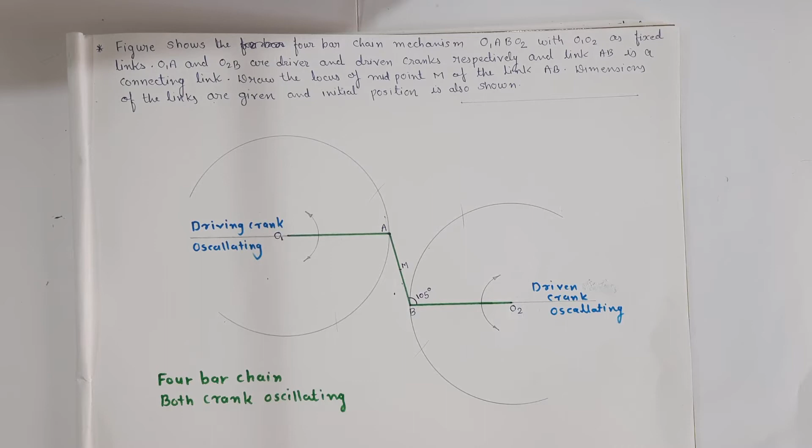Hello everyone. Today we will draw a locus of a point for given constraints in a 4-bar chain mechanism.

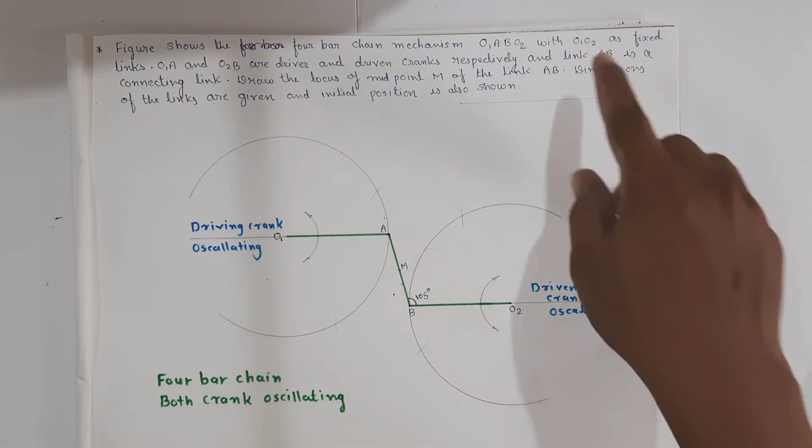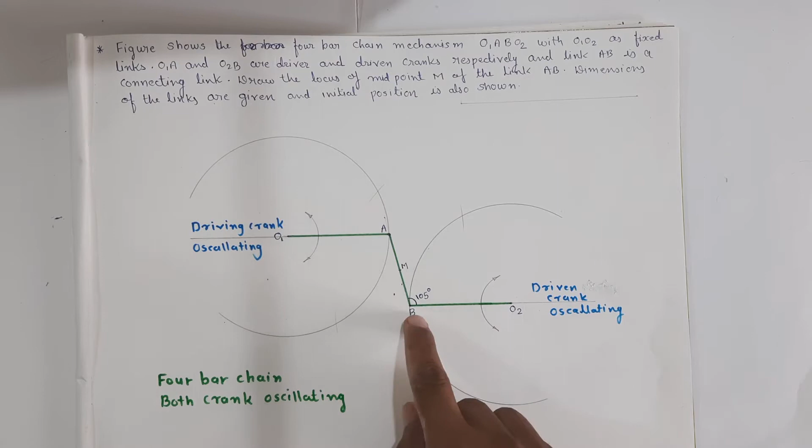So here is the given question. The figure shows the 4-bar chain mechanism O1ABO2 with O1O2 as fixed links. O1A and O2B are the driving and driven cranks respectively, and link AB is the connecting link.

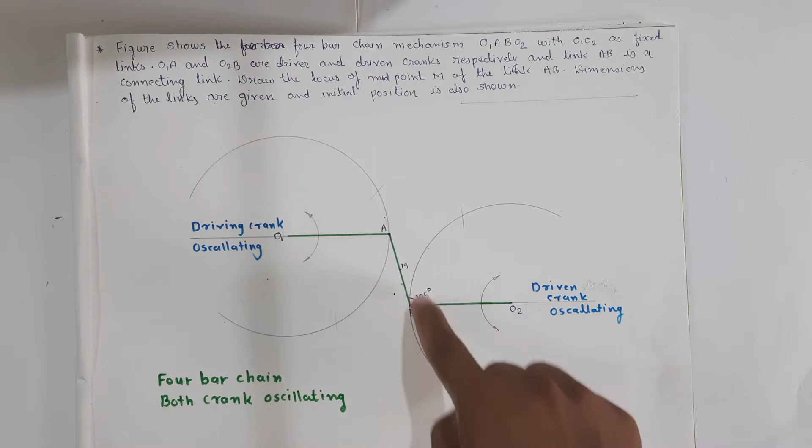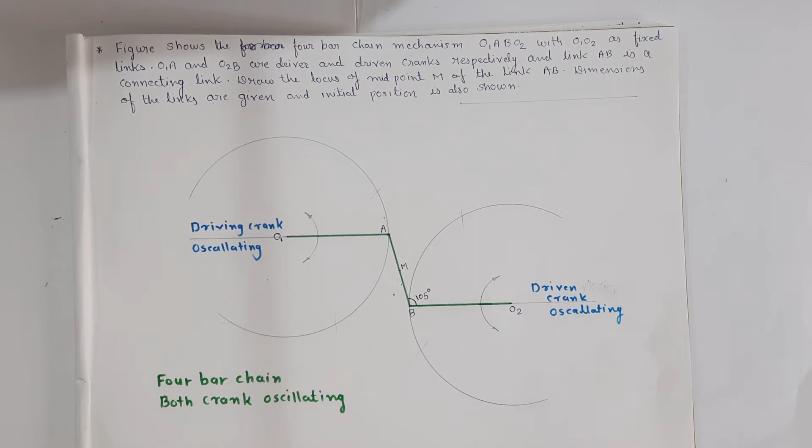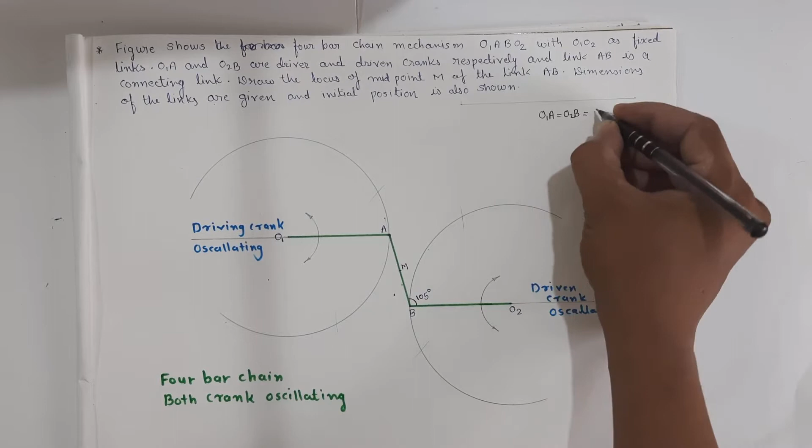Draw the locus of midpoint M of link AB. Dimensions of the link are given and the initial position is shown in the figure: O1A is equal to O2B, equal to 60 mm, and AB is equal to 45 mm.

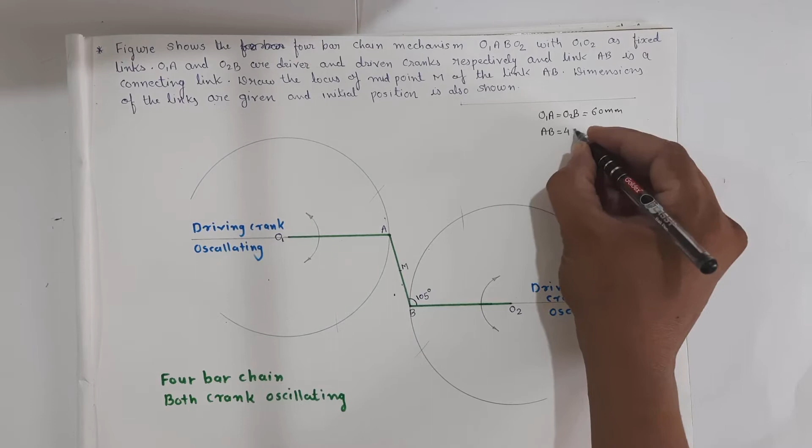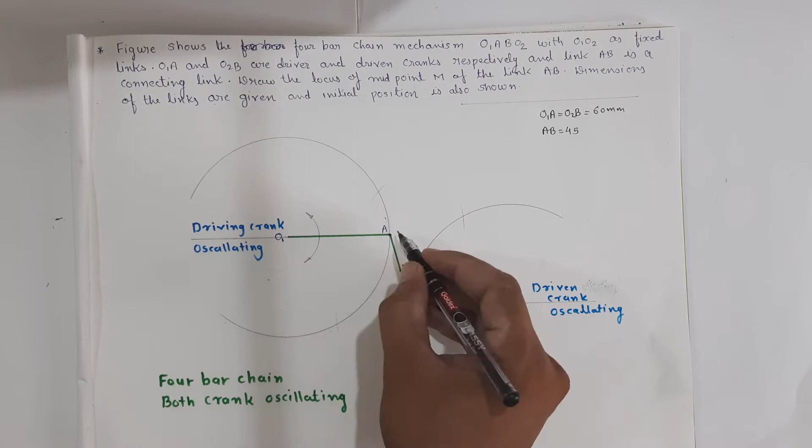First we have to mark O2, then measure 60 mm to mark B. Then measure a 105 degree angle and draw BA, equal to 45 mm. Now draw a line parallel to O2B from A and mark O1 at a distance of 60 mm from A. So draw this link.

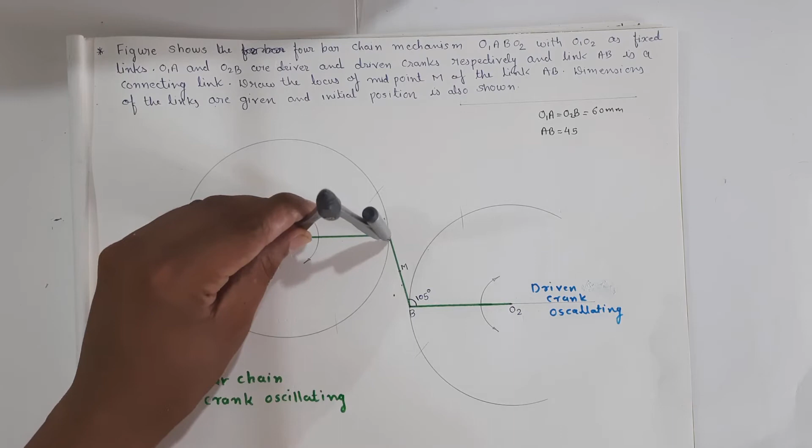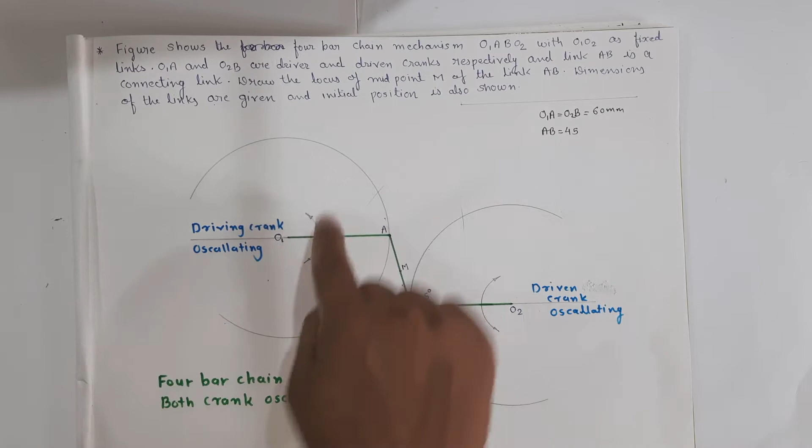After drawing that link, we have to draw the locus of A and locus of B. These links O1A and O2B are oscillating links, so they will oscillate in clockwise and anti-clockwise directions like this. Measure O1 to A and draw the arc - this will be the locus of A, and this will be the locus of B.

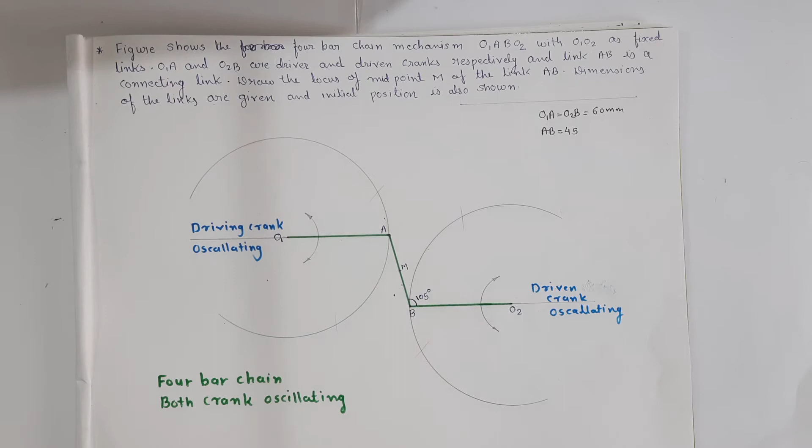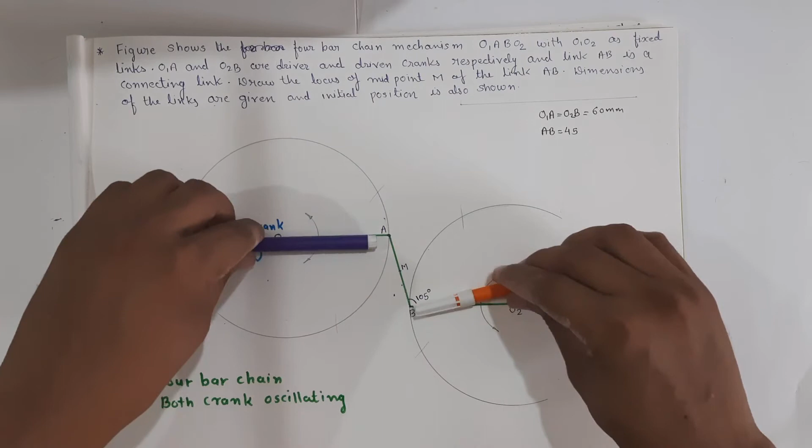After drawing the locus of A and locus of B, we have to find the maximum extension of the links, as we can see these links are oscillating like this. Both links oscillate like this. Now we have to find the maximum extension, that is the maximum extension of O2BA and the maximum extension of O1AB.

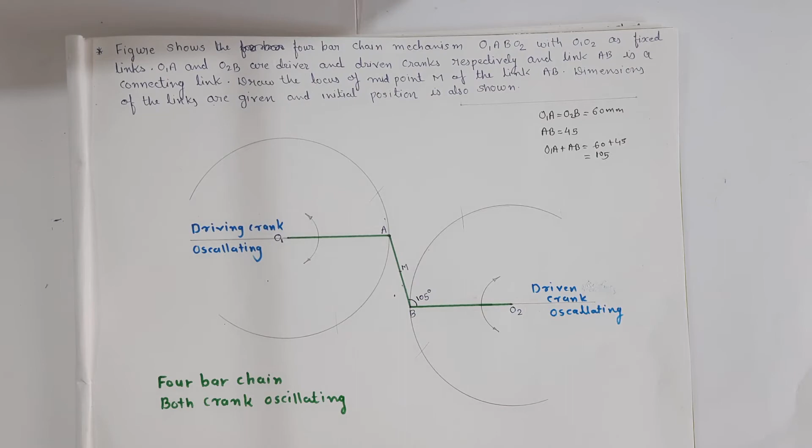For that we have to find the data, that is O1A plus AB, which is equal to 60 plus 45. So the maximum extension of the link will be equal to 105 mm. Measure 105 mm - here I have drawn the line of 105 mm - and find the maximum extension of the link.

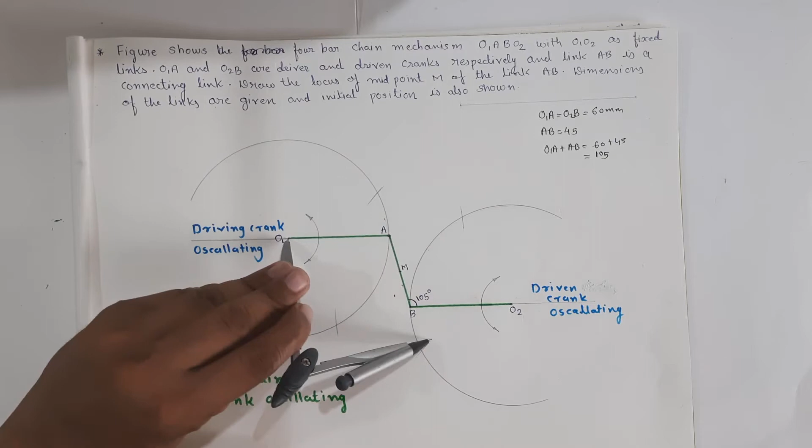Maximum extension of O2BA will be over here and over here. Maximum extension of O1AB will be over here and over here. So these are the maximum extensions of the links.

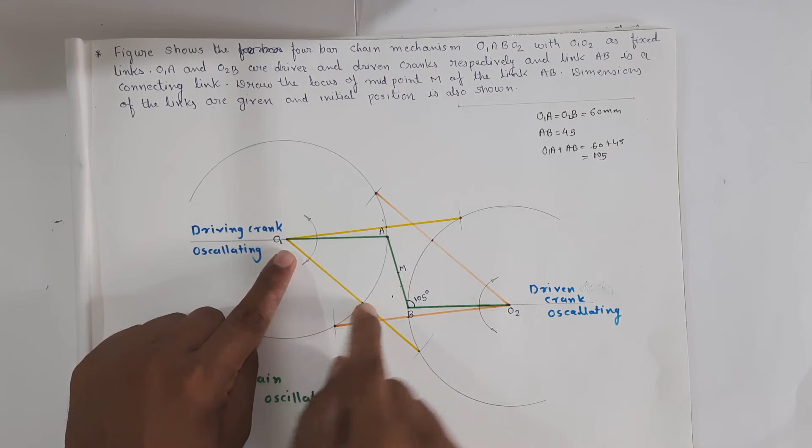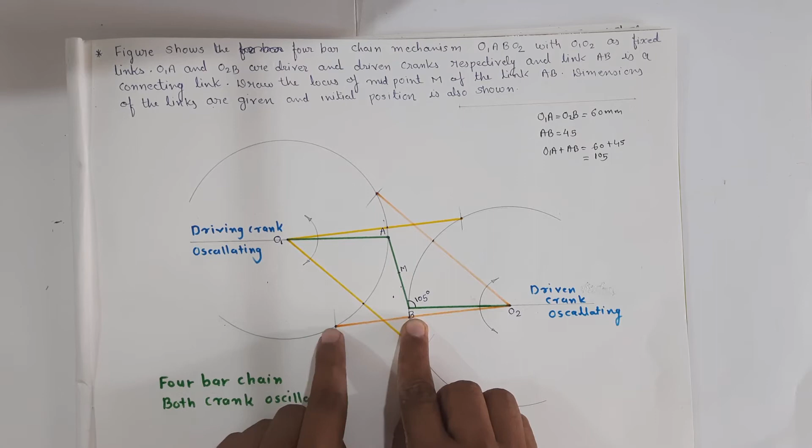That means when the O1A link reaches this point, B will reach here - this is the maximum extension of link O1AB. Similarly, whenever O2B reaches this point, A will reach here, and when the O1A crank reaches here, the link BA will reach here. So these are the maximum extensions of the link.

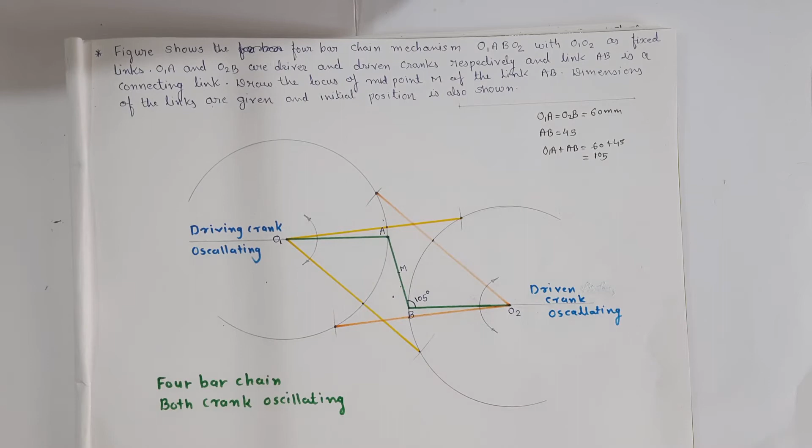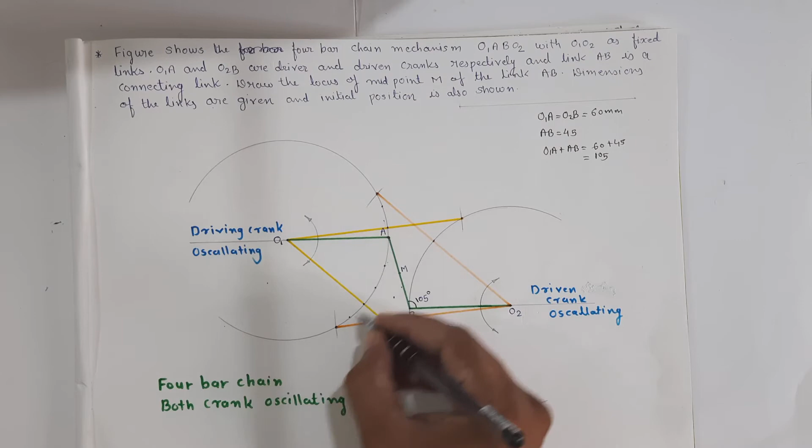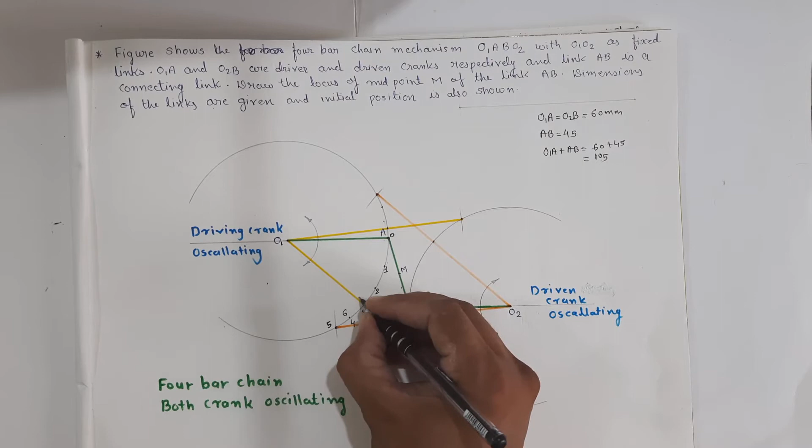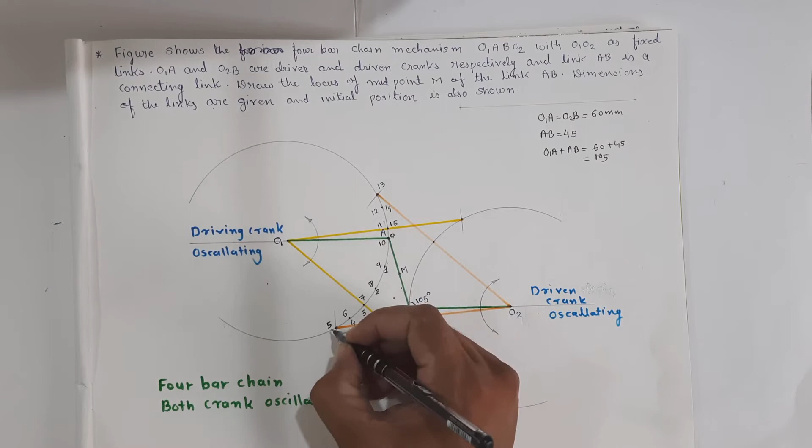After finding the maximum extension of the link, mark points 1 through 15 randomly on the arc of the circle. Let this be the A0 point - 0, A0. This will be 1, this will be A2, this will be A3, A4, 5, then after reversing 6, this will be 7, 8, 9, at 0 it will be 10, then 11, 12, 13, 14, and 15.

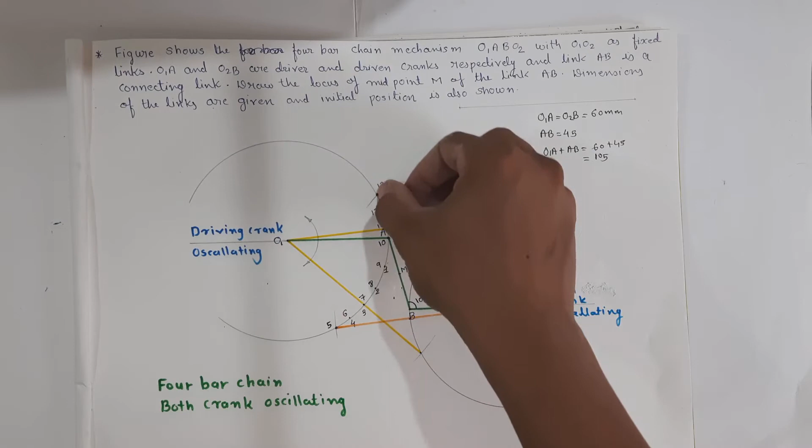Mark the points to show the locus of A. So the locus of A moves between 5 and 13.

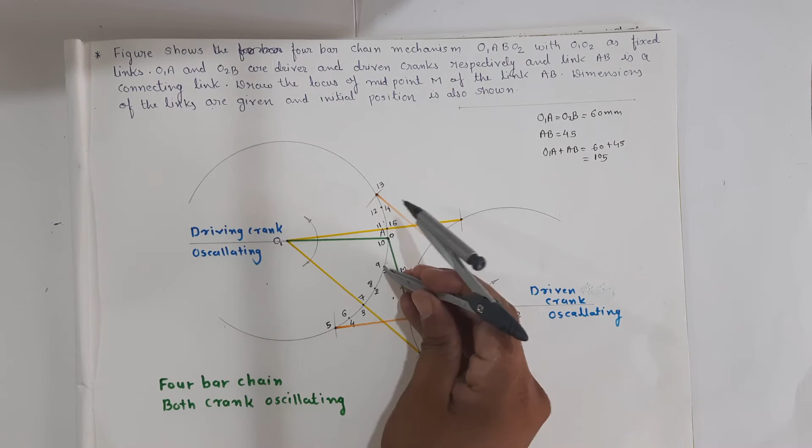Now we have to find the locus of B. For that, measure the length of the A to B link. Put the compass around point 1 - when A moves over here, we get the B1 point here. So join this B1 point.

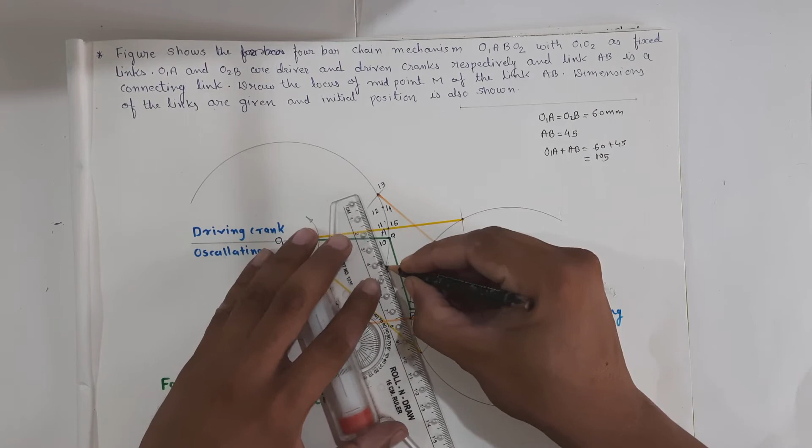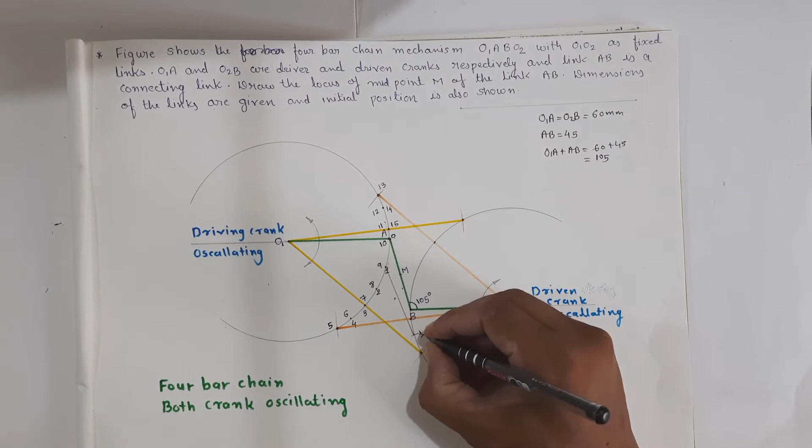So this will be 1, and as we have to find the locus of the midpoint, this will be M0. Then at a distance of 22.5 mm from B and from A, we get the midpoint at 22.5, because the length of link AB is 45 mm.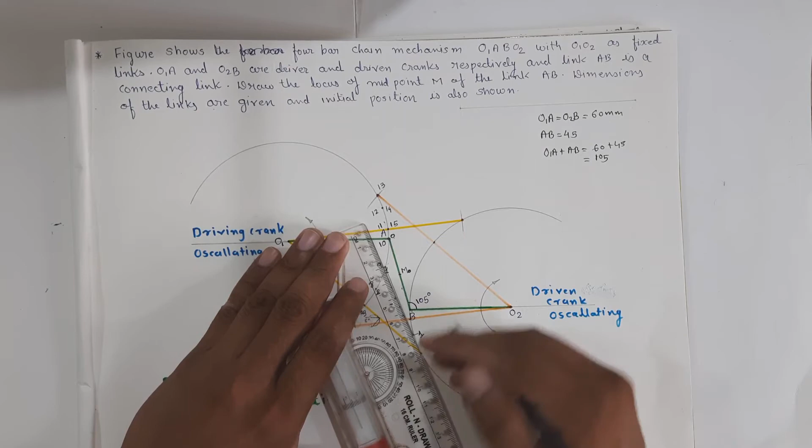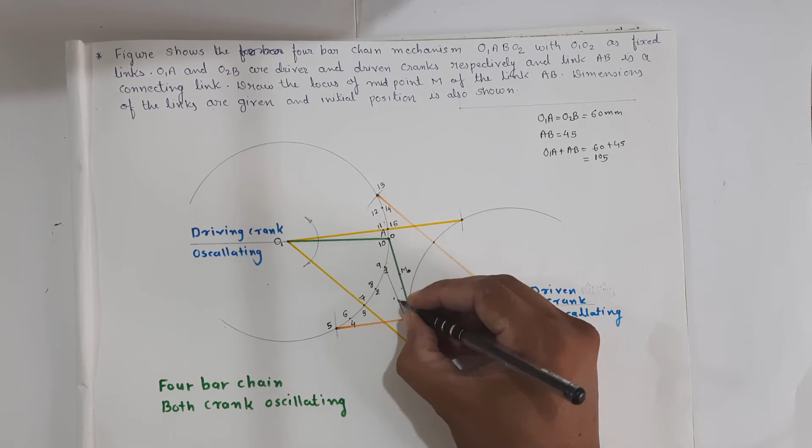So mark a point on this line having length equal to 22.5 mm - so measure 20, 21, 22, and 22.5. This will be M0, and this will be M1 point.

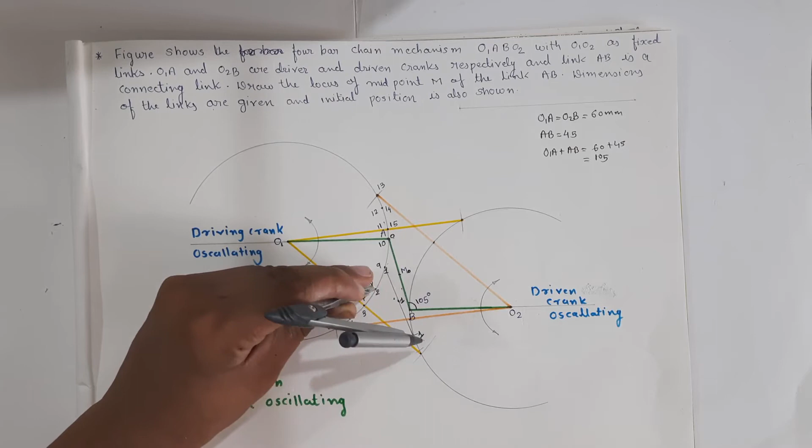Now similarly, put your compass on point 2 and draw an arc - this will be the second point.

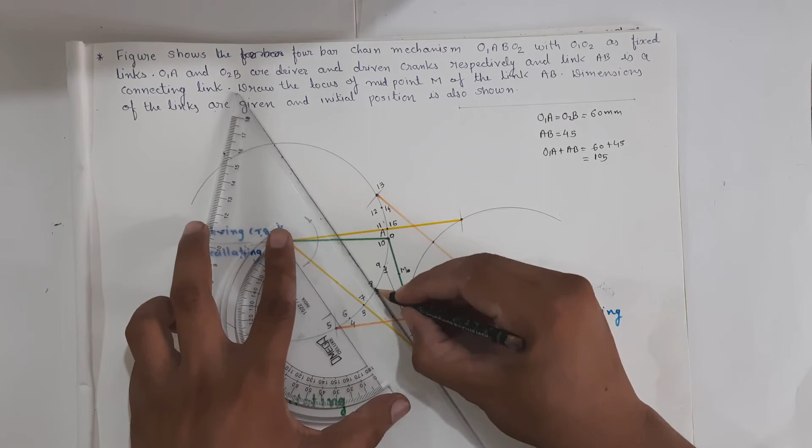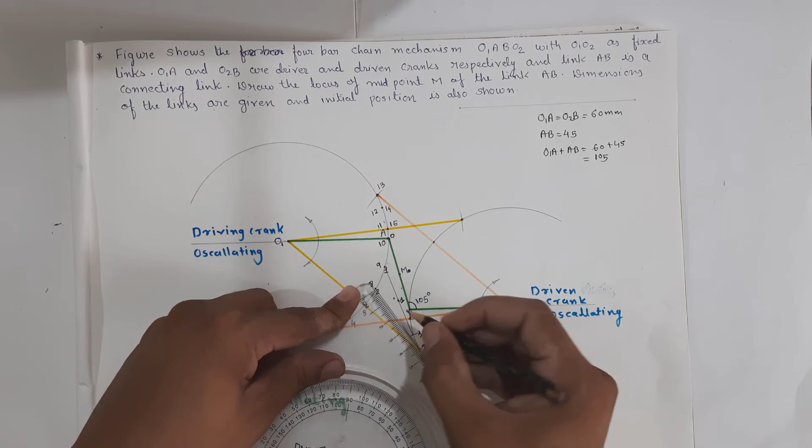Join these points 2 to 2 and mark the midpoint of the link. We will get the locus of M at 22.5 mm. So this will be point 2.

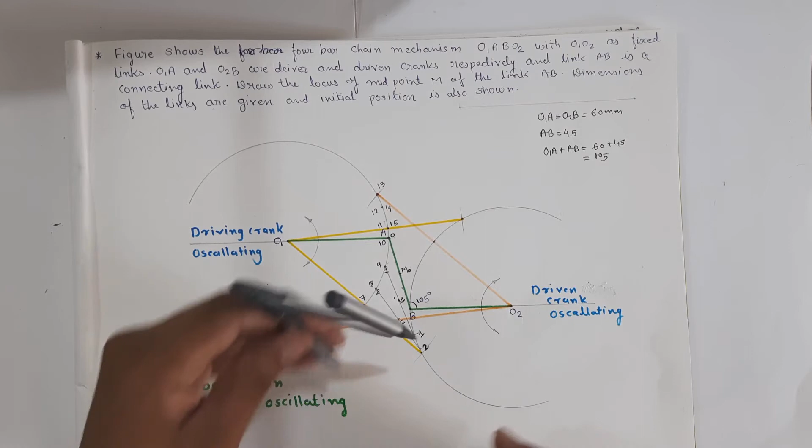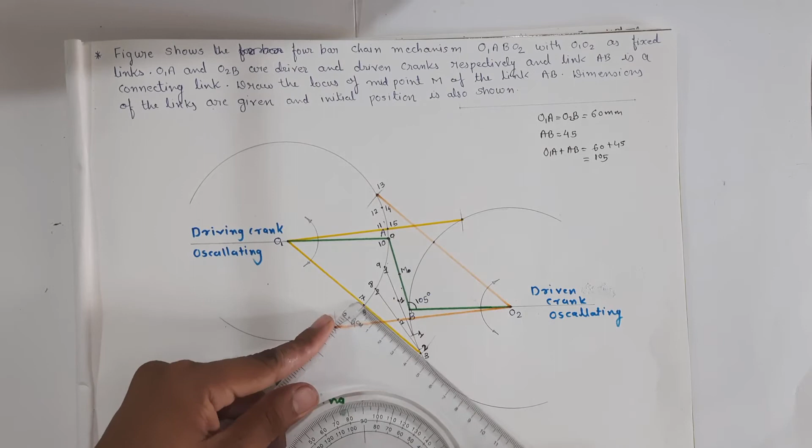Now this will be the third point that we have already marked over here, point 3. Now mark the midpoint of this link. This is the locus of link AB. So this will be the third point. So these are the locus of midpoint M, these are the locus of B, and these are the locus of A. So from locus of A, we have to find out the locus of B.

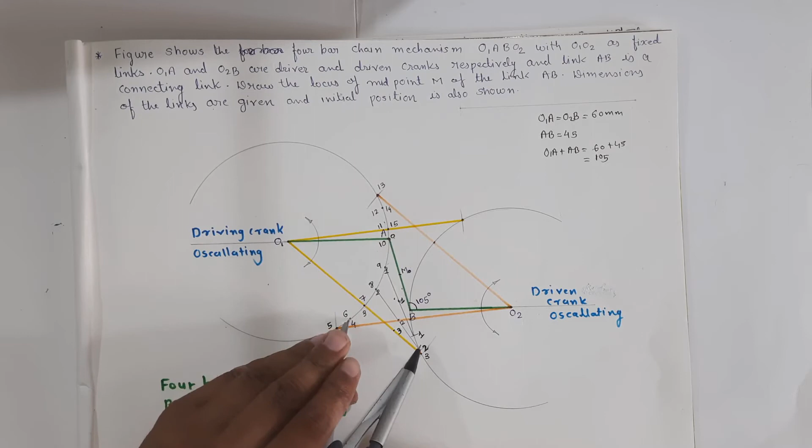Now over here we will get the third point. You have to mark the point accurately, because the distance between the 2 points is too less. So we have to mark the points accurately. So this will be the fourth point.

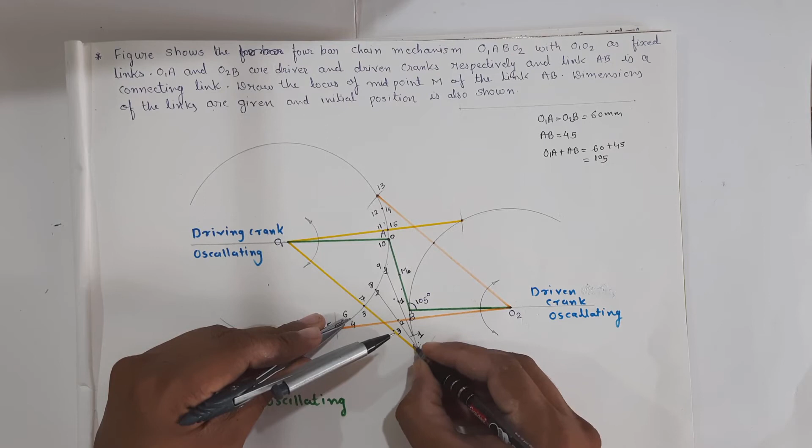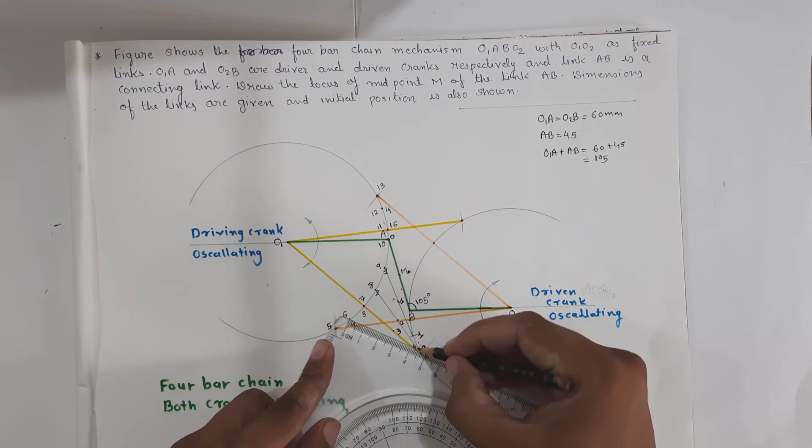Join 4 to 4 and find the midpoint of this link at 22.5. So this will be the fourth point on the link.

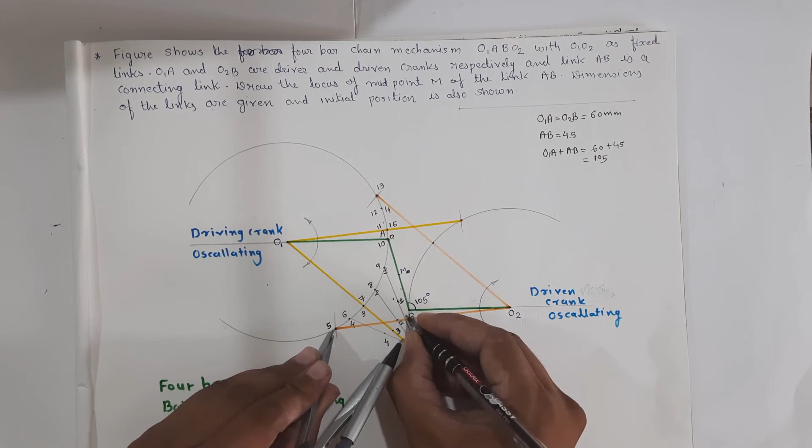Now 5 will be over here, that we have already marked. Over here, mark the point accurately. So this will be the 5th point over here.

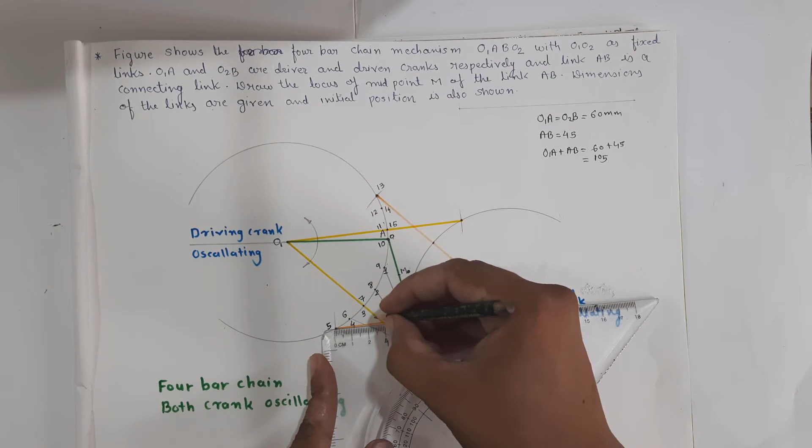Now find the midpoint at 22.5. So this will be the fifth locus of M, midpoint M. You can give the name M0, M1, M2, M3, but here due to less space we have marked only 1, 2, 3, 4. Over here also we can mark A0, A1, A2, but due to less space we have marked 1, 2, 3 only.

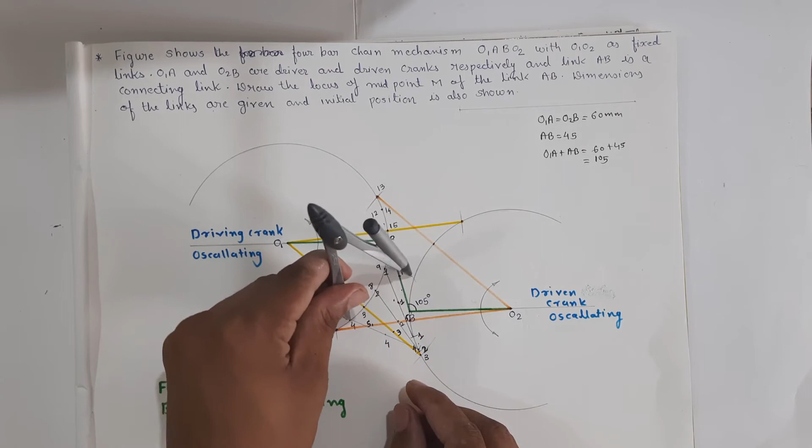Now from 6 we will mark over here. So this will be the 6th locus of B.

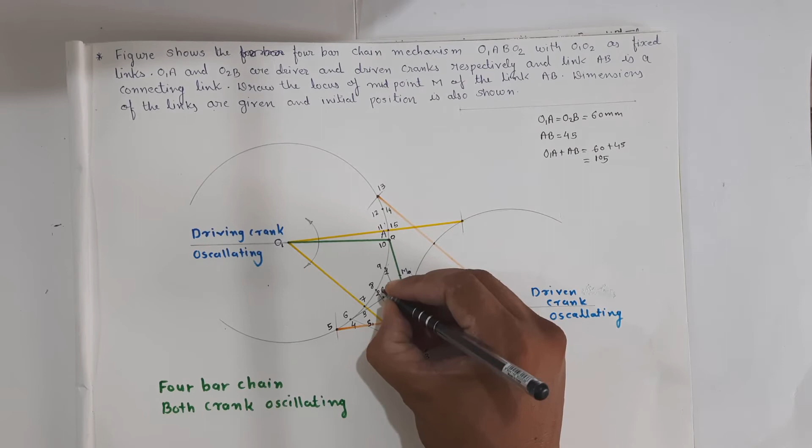Join this line, 6 to 6, and find the midpoint of 6 to 6 to get the 6th locus of the midpoint M at 22.5 mm over here. To mark that point, this will be the 6th locus of midpoint M.

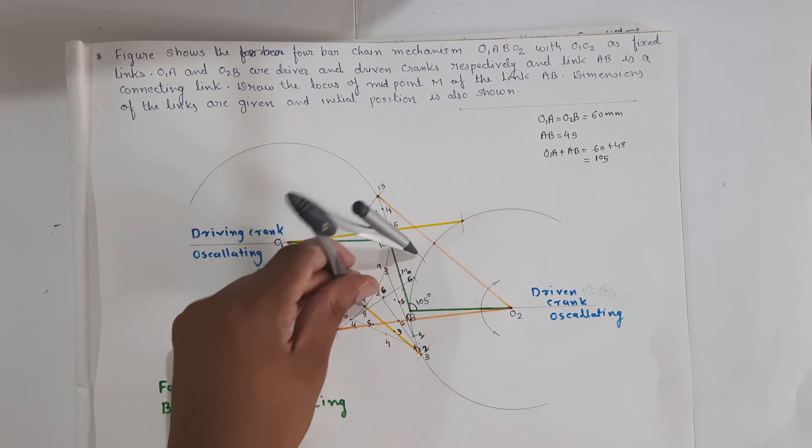Now 7 to 7, give an arc over here. So this will be the 7th locus of point B. Join 7 to 7. You have to do it step by step because you have to be precise. At 22.5, this is the 7th locus over here.

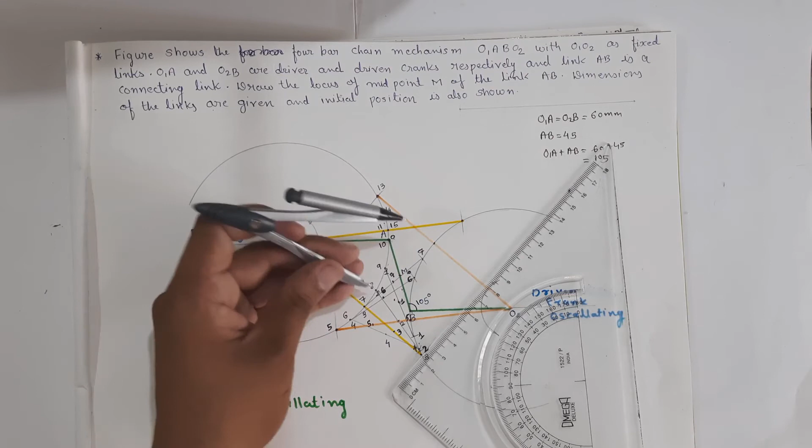Now 8 to 8 over here, give an arc over here. You will get the 8th point over here, near to this point. Join 8 to 8 and find the midpoint at 22.5 mm. We will get the 8th locus of midpoint M.

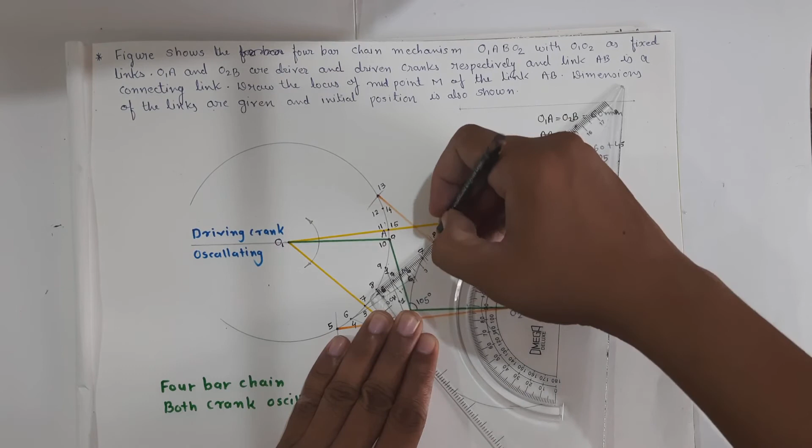This is 22.5 over here. So this will be the 8th point, the 8th locus of M.

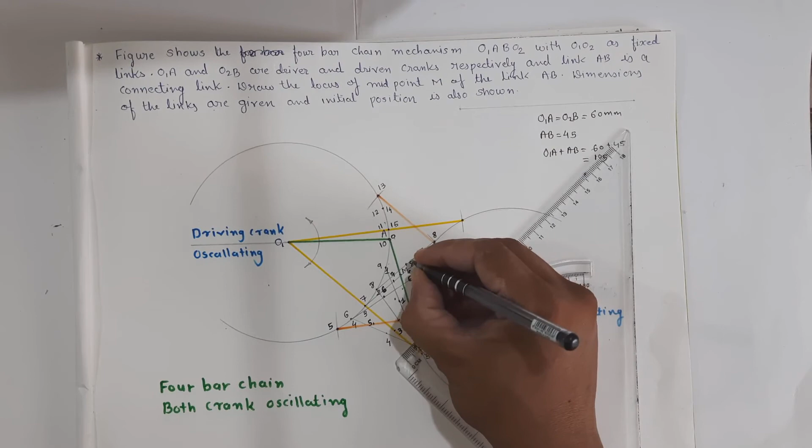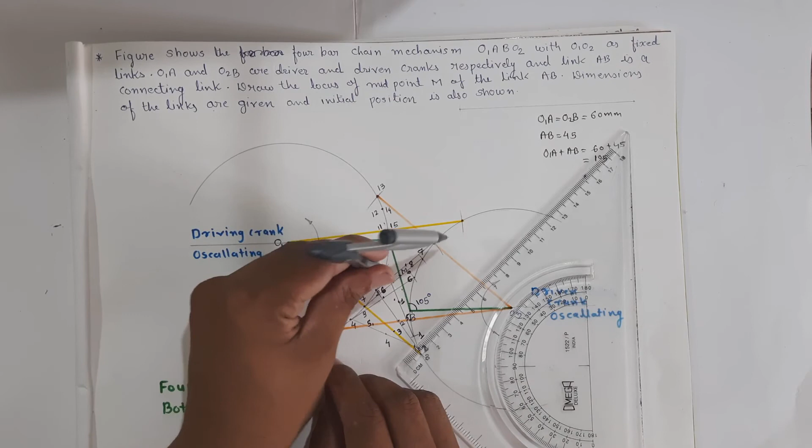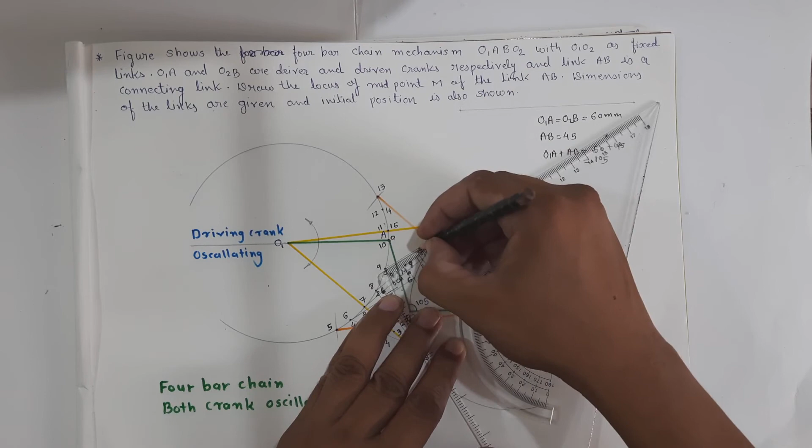Now 9 to 9, the 9th locus of point B. Join 9 to 9 and find the midpoint. To find the locus of point M, find the midpoint at 22.5 mm. So this will be the 9th point here.

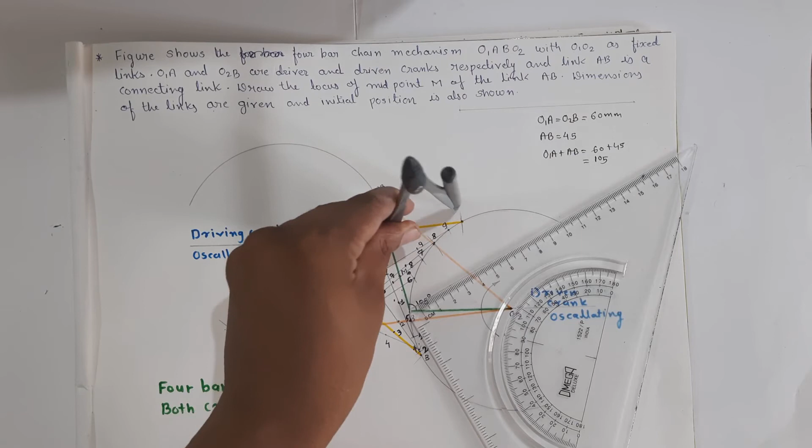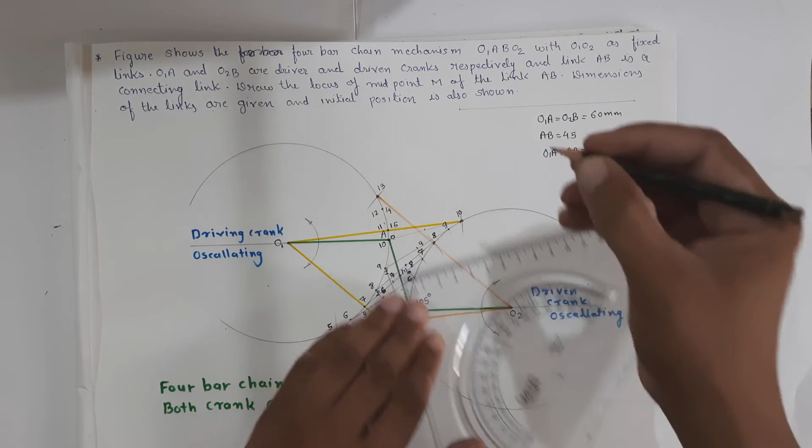Now 10 to 10. It is over here. Join 10 to 10. It is a little nearer to this point. Find the midpoint at 22.5 mm. We will get the 10th locus of midpoint M. Now 11 to 11.

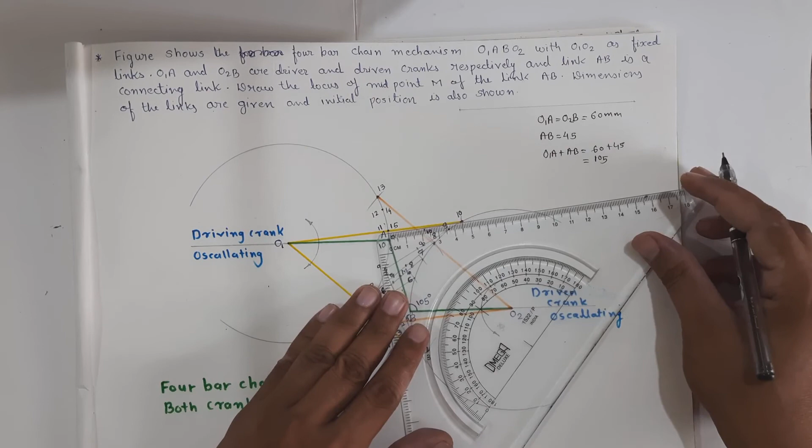Find the midpoint at 22.5 mm. This will be the 11th point of midpoint M.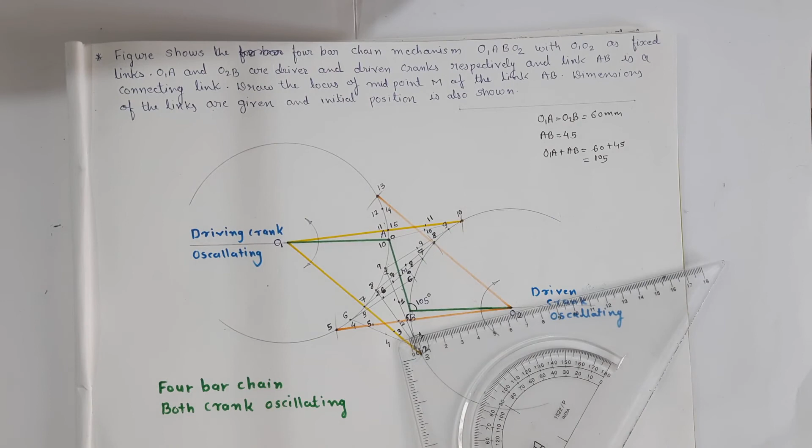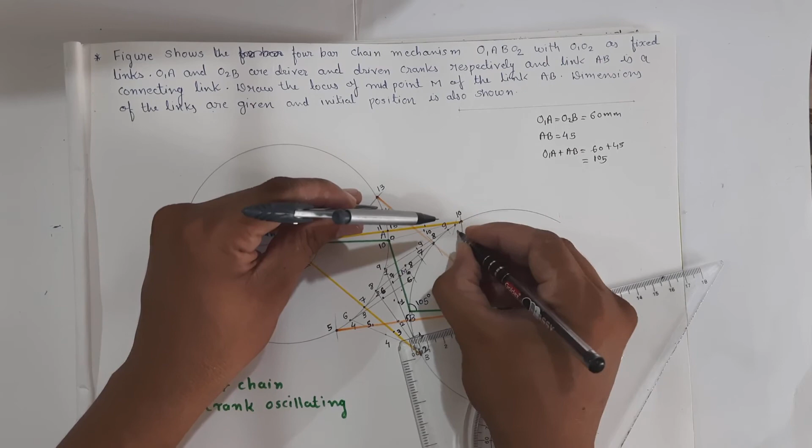12, reverse over here. This is the 12th point. Join 12 to 12. Find the midpoint at 22.5 mm to get the 12th locus of midpoint M. This is the 12th locus of midpoint M.

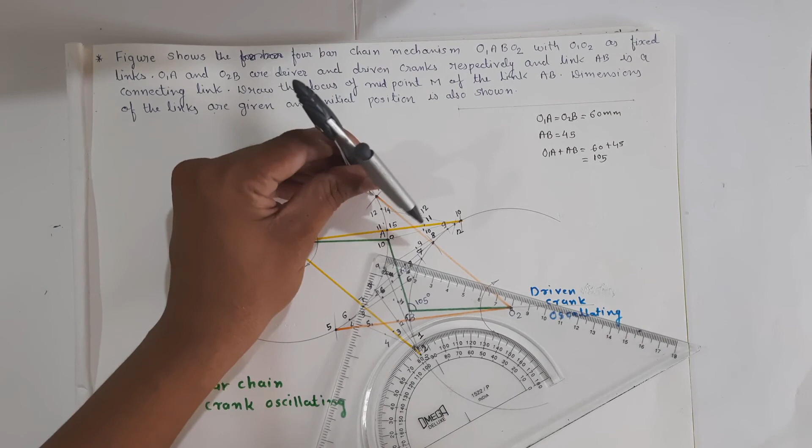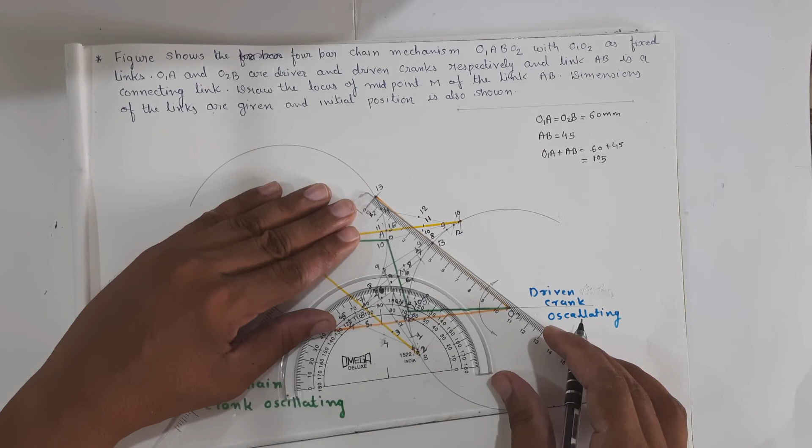Now 13 to 13. 13 will be over here at this point that we have already marked. So this is 13. Find the 13th locus of midpoint M. This is 13. Now 14 to 14.

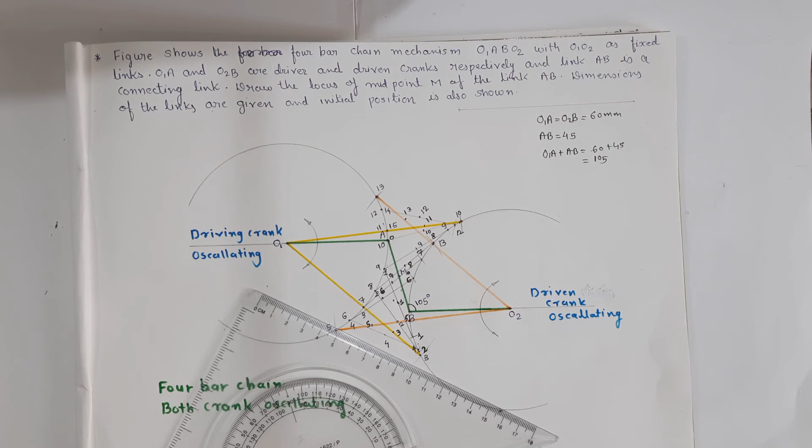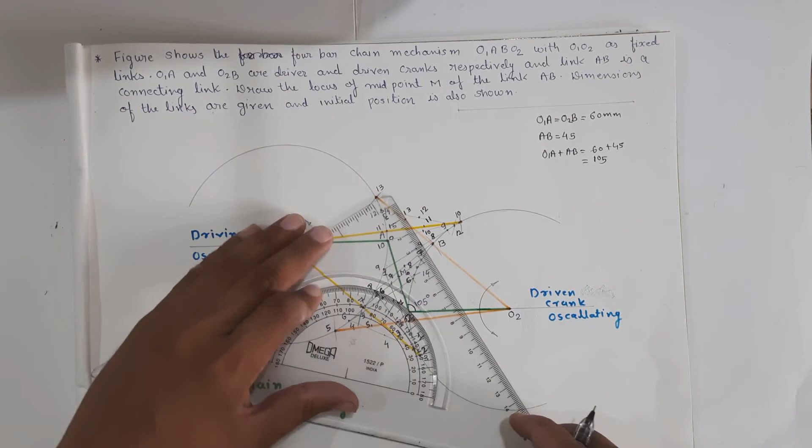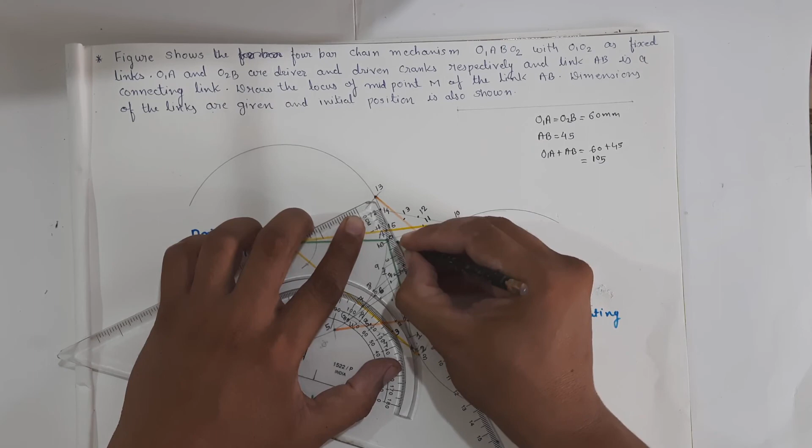14 will be over here. Join 14 to 14. Find the midpoint to get the locus of midpoint M at 22.5 mm. This will be the 14th point, the 14th midpoint, locus of midpoint M 14 over here.

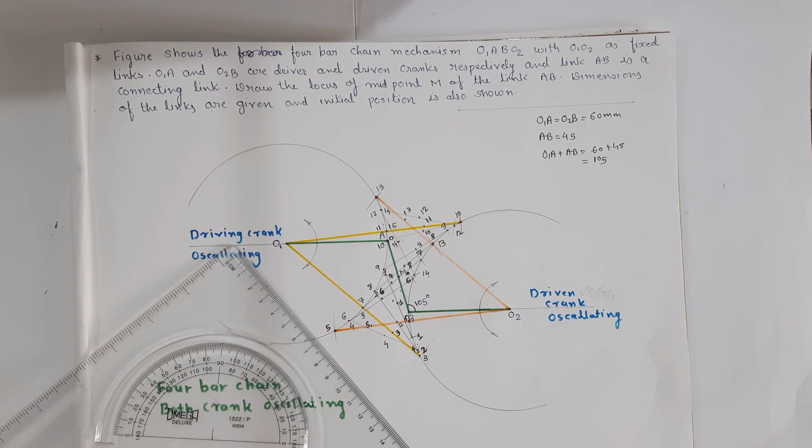Now 15 to 15. We will get 15 over here. Join 15 to 15 and find the midpoint to get the locus of midpoint M 15, at midpoint 22.5. This will be the 15th locus of midpoint M. Now mark this point.

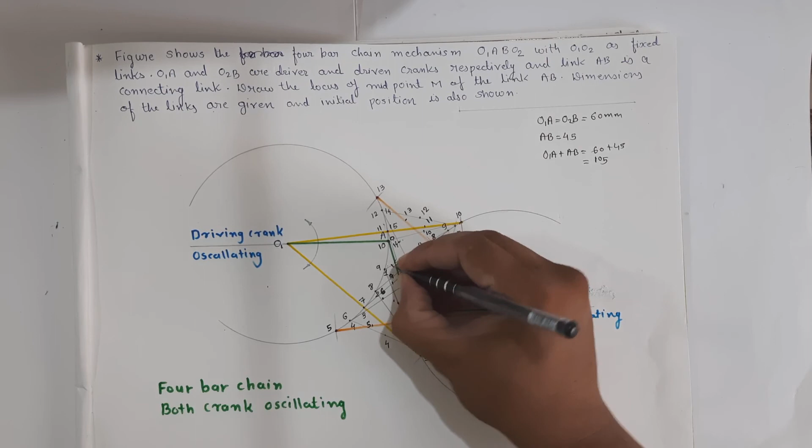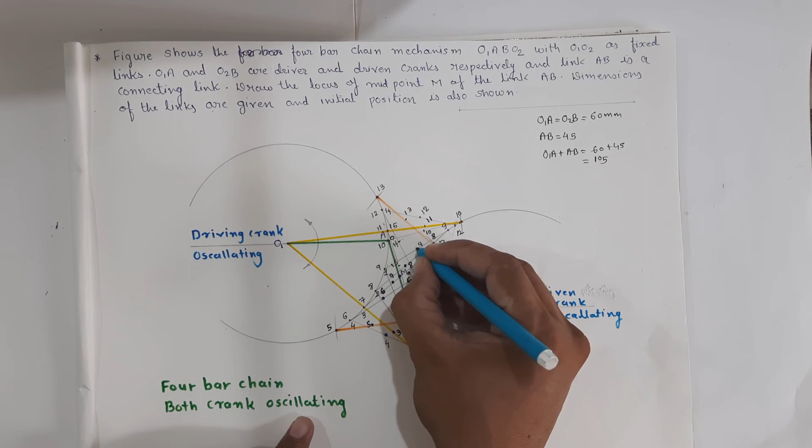This is 0, 1, 2, 3, 4, 5, 6, 7, 8, 9, 10, 11, 12, 13, 14, 15. So these are the locus of midpoint.

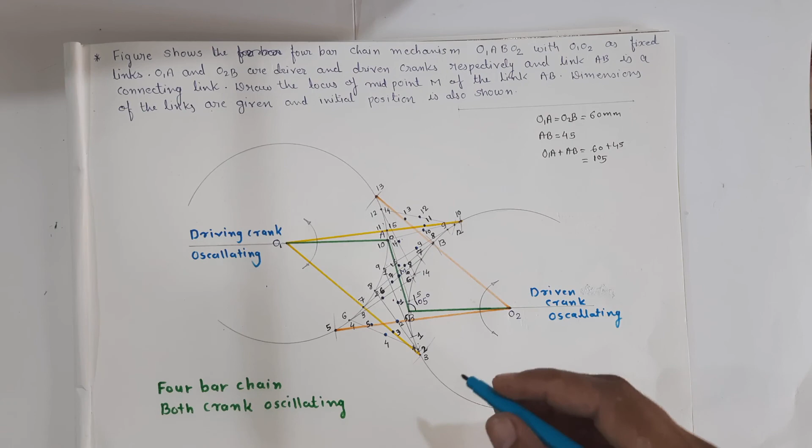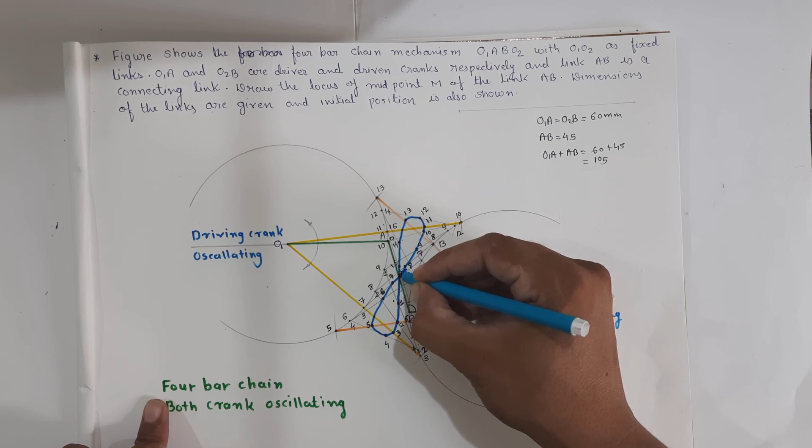I am joining these points with a freehand curve, that is 0, 1, 2, 3, 4, 5, 6, 7, 8, 9, 10, 11, 12, 13, 14, 15 and again 0. So this will be the locus of midpoint M.

This problem is a little bit complicated, but it is easy to define the midpoint if we do the step by step process. So this is it for today. Thank you.